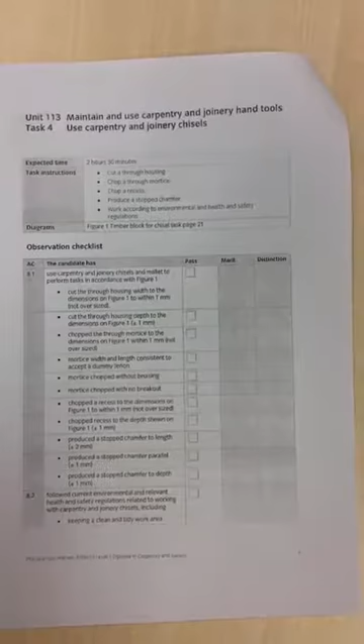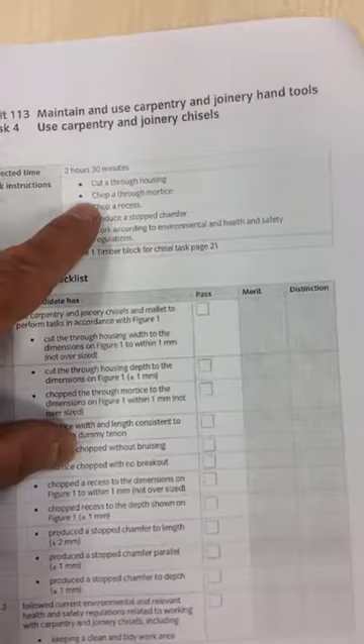Okay, so now we're going to look at the unit 113 task 4. It's about using hand tools and it is about chiseling. Now this task, it's not difficult, although if you get your marking incorrect to start with, then things can go very wrong. So during this task you will have to cut a through housing, a mortise, a recess and a stop chamfer.

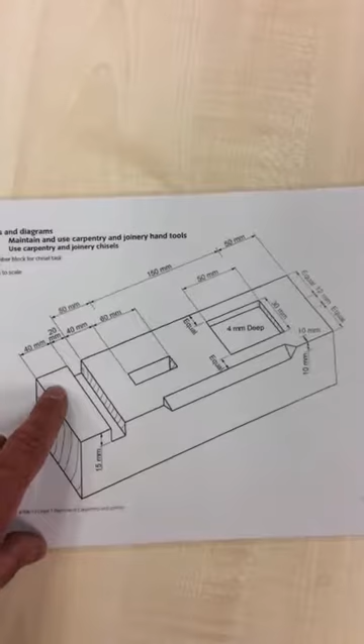Right, as you can see on the picture, you've got some measurements all here. Now please be very careful. The piece of wood I'm going to give you will be planed all round, so it'll be all prepared for you. You must do all of your marking before you do any manufacturing. So do not use your cutting tools before everything is marked up.

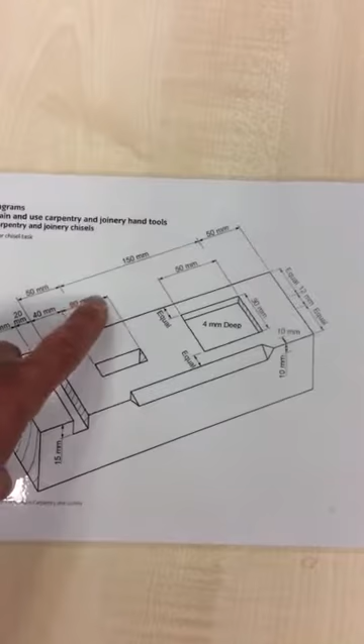So you start on that corner and you measure 40 mil, you make your line using your square, you measure 20 mil, you make your line using your square, you go back to 40 mil here and you make your line to make your mortise. Your mortise will be 60 mil width, so you make your line here. Be aware that this measurement is nothing to do with those lines, it is this one.

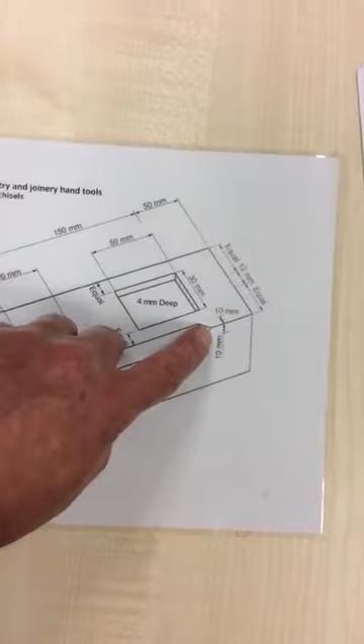So from this 20 mil line here, you measure 50 and you make that line. This will be that corner. You then measure 150 and that will become that corner and also that line as well for the recess. You come back 50 mil to mark this one.

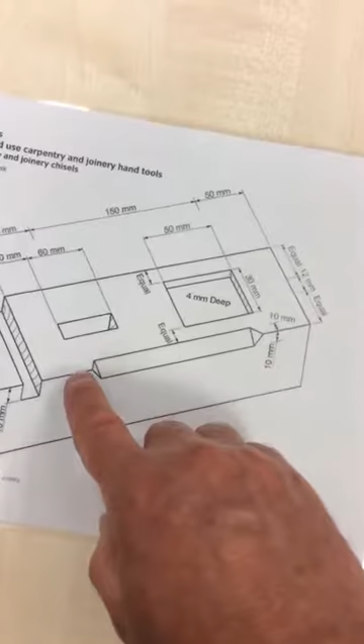You can see that the mortise is 12 mil in width, so you're going to use a 12 mil mortise chisel and it is absolutely center to that piece of wood. So when I say center, it's from here to here, nice and center. It says equal and equal from both sides.

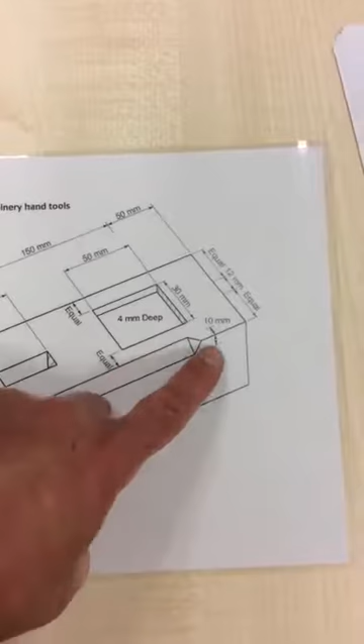This recess one is slightly different. It's not equal in the width of the wood. It's equal from that line, not that line, that line. You can see the same distance here and here. So you know you've got those two lines here, but you do not know about those two. The first thing to do is to do that chamfer.

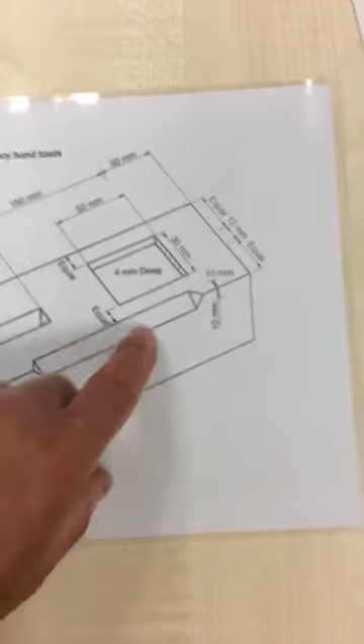Now the chamfer is 10 mil at 10 mil. You measure from the 50 mark that you've got. Using your marking gauge, you make a little 10 mil line and a 10 mil line here. Once you've got that line, you can then center your recess. Once you get your center, you can put your 15 mil on each side, which will make a 30 mil, and then you've got your square for your recess.

Once your piece of wood is all marked up, ready to go, you must not forget to mark the mortise on the other side. So using your face and edge and your try square, you're going to line up the lines for the mortise because this mortise is going right through.

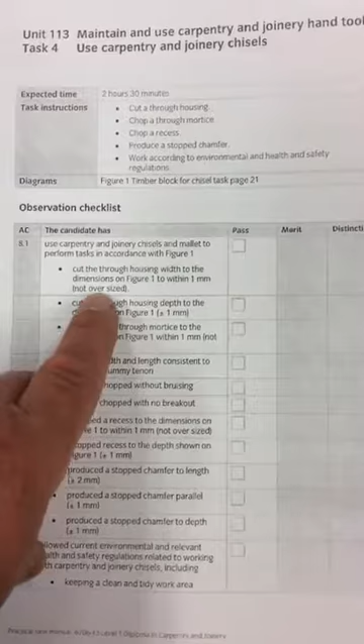Okay, so we look back at the criteria, and the criteria, as you can see, is just a pass on this one. So you've got to make sure that you do the housing first and stay within the 1 mil, and again it must not be oversized. The housing depth has got a tolerance of plus or minus 1 mil. So you start with this joint.

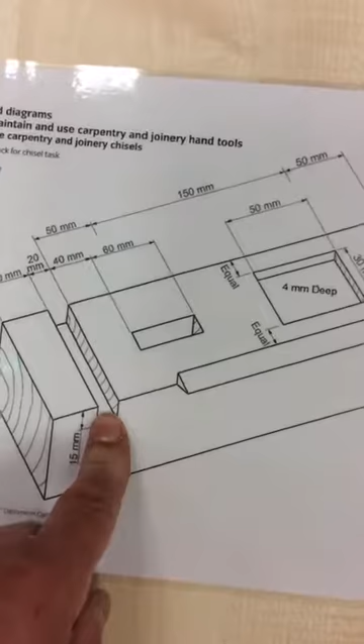So using a tenon saw, you're going to cut your line to the depth required of 15 mil, and then you're going to put your piece of wood in a vise, and using a chisel or mortise chisel, you're going to clean that housing. Now remember, you cannot be oversized. So the 15 mil, the 20 mil must not go oversized, so you must stay 20 mil, and you are plus or minus 1 mil for the depth.

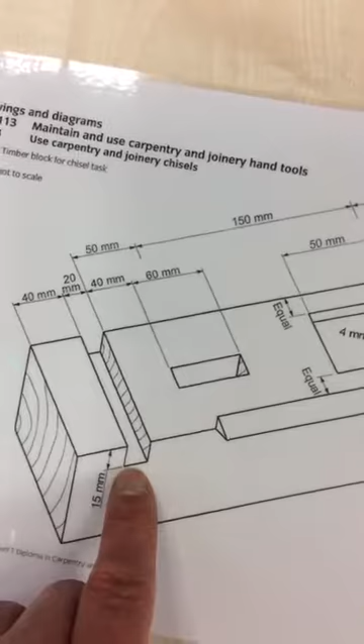So we will accept 14 mil or 16 mil. Once you've done your housing, you're gonna go on to the mortise. So again, using the mortise chisel, you're gonna go straight through. So you start on one side, going halfway through, you turn your piece of wood around, and then you make your mortise the other way, so you don't do any breakout. Remember to follow what I instructed you during training when you make a mortise.

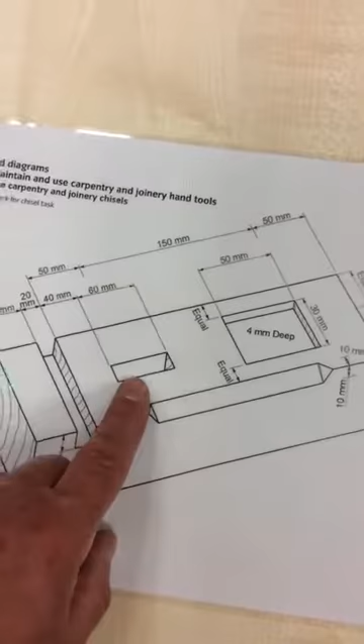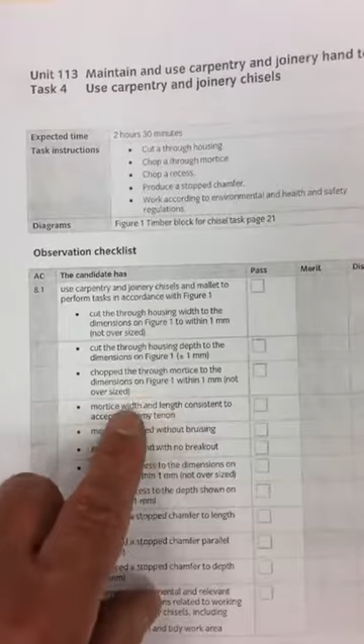If you look at the assessment criteria, you must chop the mortise right through to the same figures, not oversized again. So if it says 60 mil, you cannot be 61, that will be a fail. You are allowed 59. And then we go back to the mortise. The mortise width and the length must be consistent.

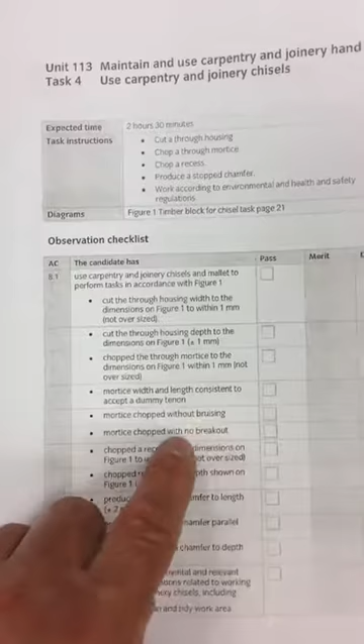I will try my tenon to make sure that it fits nicely. Do not bruise your mortise when you chop it, and no breakout, especially no breakout. Make sure you turn it around to get a nice clean cut. Once your mortise is done, you will then go onto the recess cut.

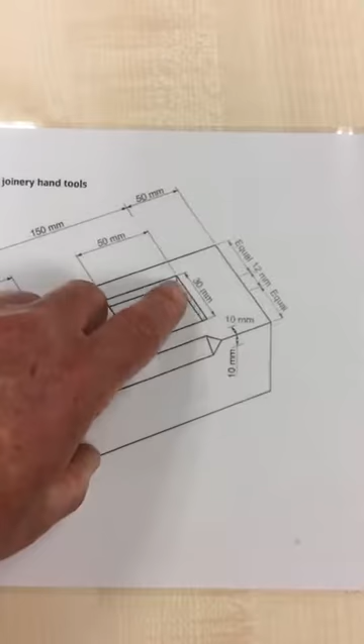So be aware here, with a very sharp bevel edge chisel, you're gonna clean your cross cuts like this. With your bevel edge chisel, you're gonna mark it and mallet it slowly. As for along the grain, my advice to you will be not to put your bevel edge chisel on the line, but slightly on the inside, leaving a mil. So use the bevel edge chisel, leaving a mil along the side, because it's along the grain, you may break it out or go in, and you don't want to do that.

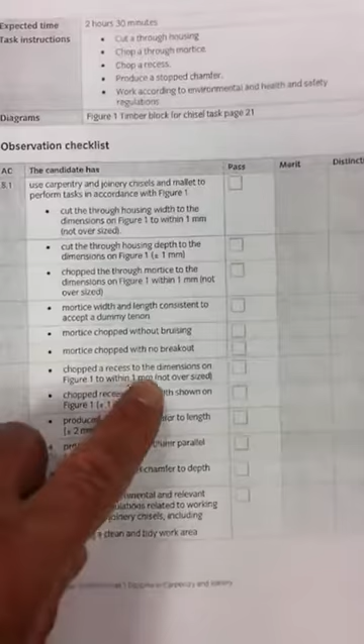So slowly you start to remove up to a 4 mil depth for the recess. And once you finish that, then with your chisel you can go back to your line and do a really clean cut, which will be 30 mil. If you look at the criteria for the recess, it must be to the dimension, not oversized again. So please ensure that they are 30 mil by 50, not oversized, or that will be a fail.

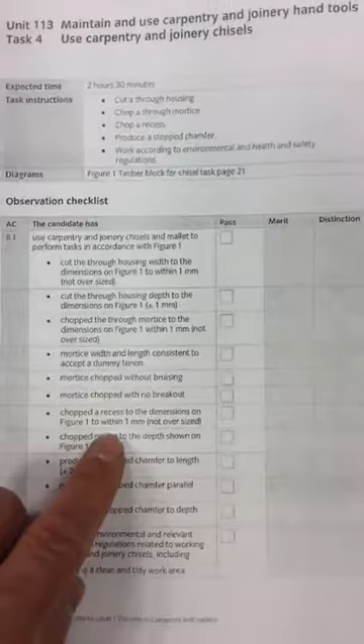The recess must be to the depth required, which was 4 mil. On this, they will allow you a plus or minus 1 mil. So we will accept 3 mil, 4 mil, and 5 mil. Anything over or under this will be a fail as well.

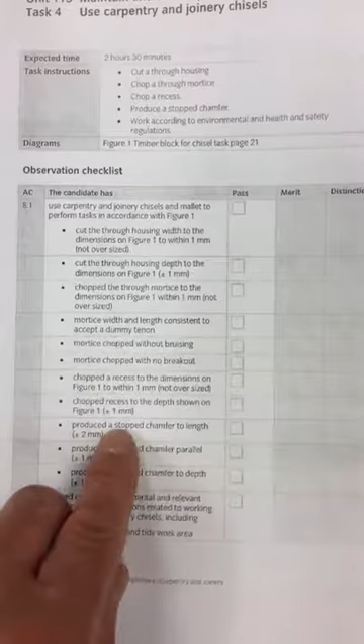Finally, you're gonna do the stopped chamfer. Now the stopped chamfer, if you've got a very sharp chisel, it's absolutely fine. What I like to do is to start with those cuts, which will be at 45 degrees. So you can use a mitre square to do your marking at 45 degrees, following your 10 mil line that you have done with your marking gauge.

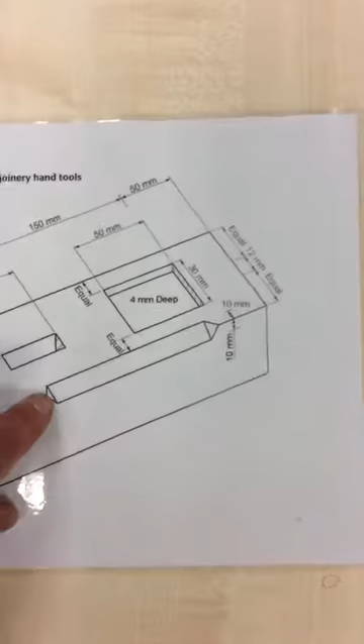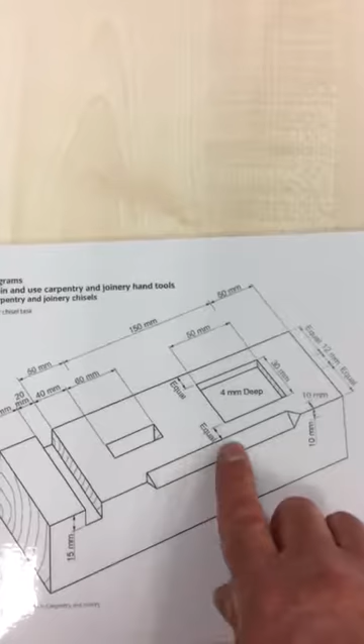You start by cutting with your chisel slightly away again, so leave a little bit of your line, so you don't clean it straight away. You can always come back to it and do a nice finish. Once you've done your 2 cuts, your chisel will take off the 2 corners that way. Once this is done, using the chisel, you will just clean up your chamfer, and when this is over, you can just finish those 2 mitres really nicely.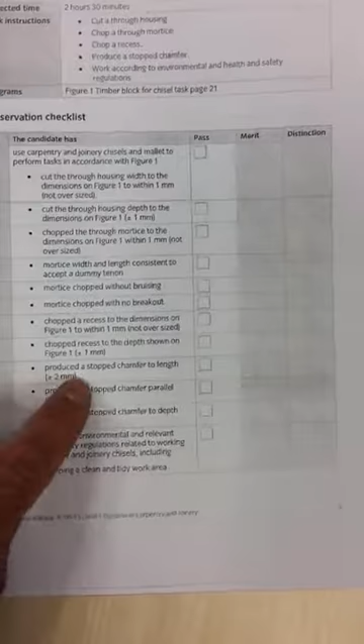Again, we come back to the criteria. The stopped chamfer, you've got plus or minus 2 mil in length and a parallel of 1 mil. So looking at the criteria here, we will allow 10 mil or 11 mil or 9 mil. We've got 1 mil tolerance, and for the length, it says 150 mil. We will allow 2 mil tolerance.

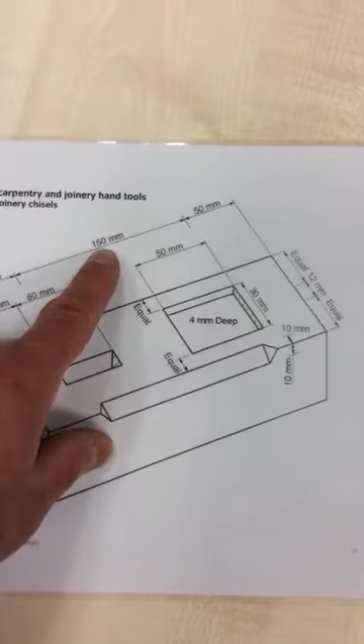And that's it. Once you finish this, come and see me. We will mark it, and hopefully you'll get a good grade. Thanks.